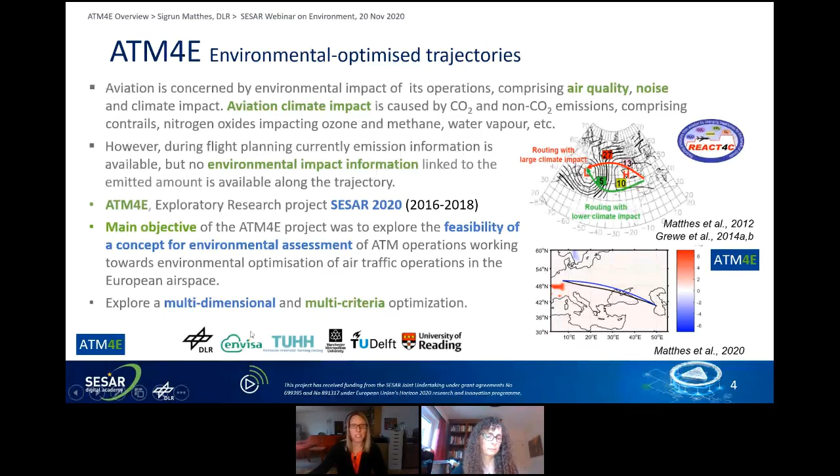This was a collaborative project, a small consortium led by DLR with colleagues from Envisa, TU Hamburg, Manchester Metropolitan, Delft, and Reading.

So how do we generate such environmental change functions? I'm showing here for local air quality, we established this kind of source-receptor relationship. We give an emission and follow it: how does it reach the ground, how does it impact air quality? This is based on dispersion modeling and chemical transformation modeling, and you see how emissions get transported and transformed.

These simulations were performed with a tool provided by Eurocontrol, also from Envisa. This tool allows you to use the meteorology and the setup of the airport, and you can generate the associated function for a specific airport.

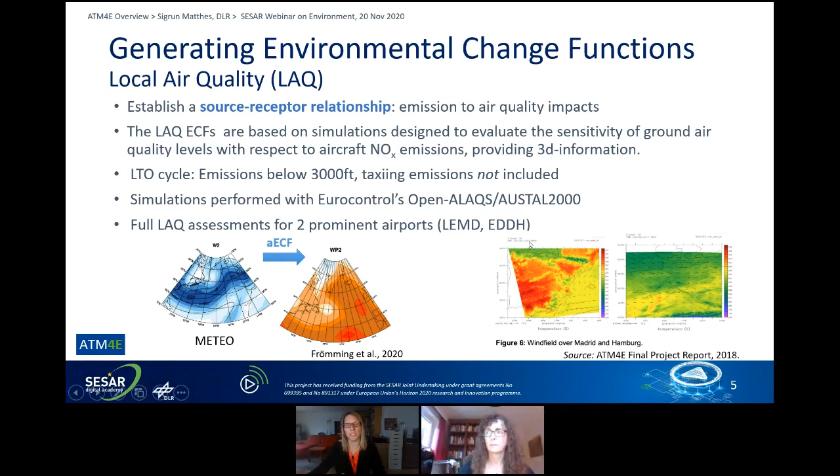So how does it look like? You have the dispersion model, the environmental impact of a certain unit emission, and you put it on the ground. Then you see where people live, who gets impacted by this fresh exhaust, who suffers from the decrease in air quality. By combining those two values—the amount of decrease in air quality and the number of people impacted—you can get a total measure of the impact of an emission release in a specific situation.

What you see here clearly is that the wind is advecting the air pollution in a certain direction, according to the prevailing wind situation. It was the same in Hamburg and Madrid on that specific day. While the emissions are advected, if you weight it with the population being exposed, it shows that the zones of large impact are to the northwest, because the pollution is transported to the places where people live.

By combining such information, we can provide a three-dimensional—or, because it depends on the meteorology, the date, the vertical layers, and the temperature profile of the atmosphere which determines the transport processes—a four-dimensional function, which is this environmental change function.

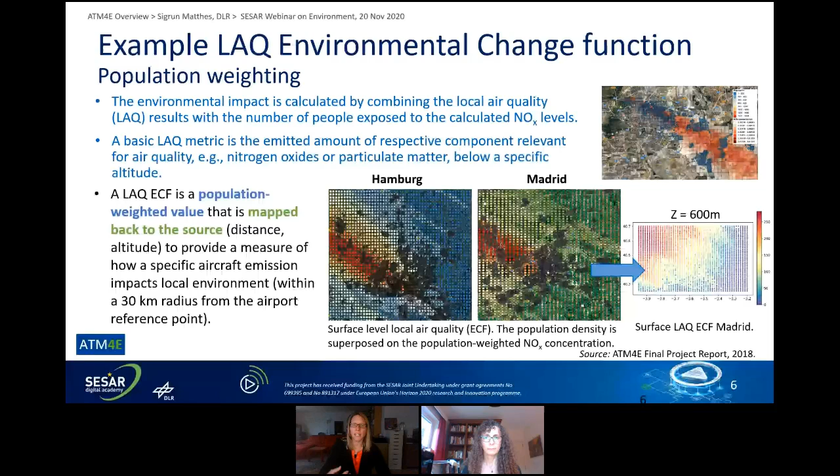We did the same for noise. I want to mention what the lesson learned was, because noise is much more complex than local air quality. You cannot simply emit a kilogram of a certain species. You have to know what the aircraft is, what the engine is, what the flaps are, and so on. So you have to make it much more complex.

The input data is much more multidimensional, and you also have to have a noise metric which works. So what is the noise metric you're going to be using? Of course, noise is also an issue for the operational and safety standards.

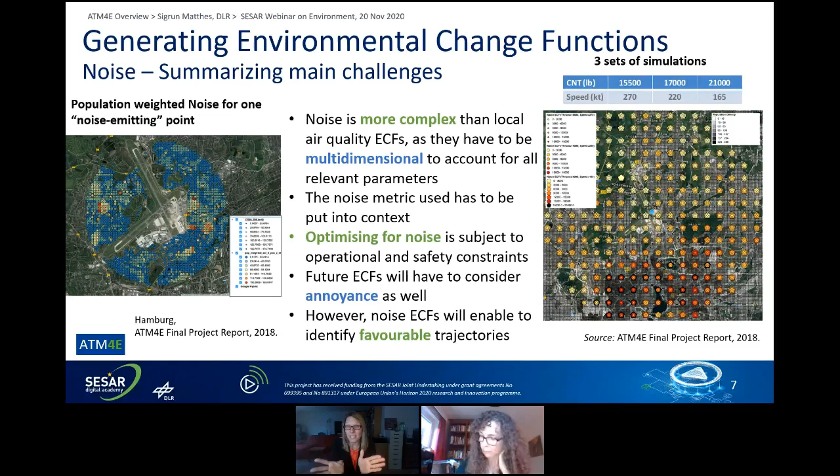For noise, there's also a tricky thing. There's not only a noise level, which is kind of physics, but there is also the question of the annoyance of it. So here is a kind of challenge identified: to define such a metric which allows us to use the same concept to see that emitting at a certain point means a certain amount of annoyance generated. However, we felt that having such noise ECFs available would enable us to identify favorable trajectories according to the metric.

So what we then did, after constructing these ECFs for the airport, was a one-day case study exploring a city pair by flying from Hamburg to Madrid. We did a trajectory optimization flying out of the departure airport, up to a certain flight level, and then into our destination airport, comparing always to the fuel-minimal solution.

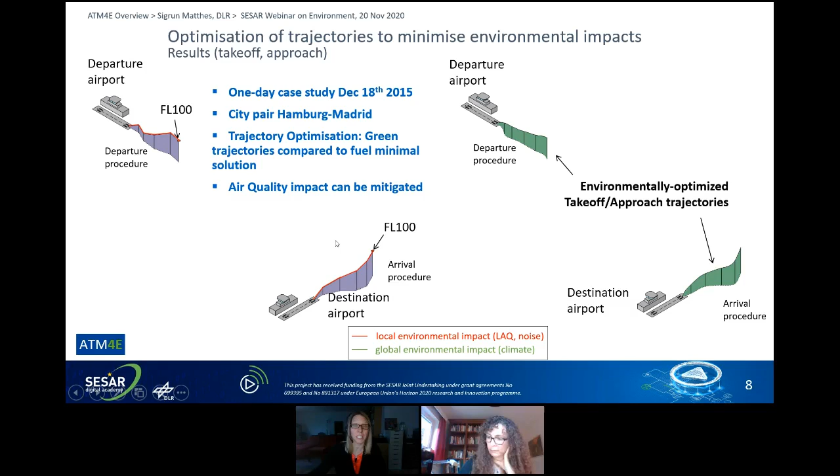To see to what extent an environmental optimization changes your trajectory, what is shown here is from our feasibility study for this city pair. This is the altitude, and with the color coding we are showing the local ECF function. So if you have white, there is no impact; if you have red, there is high impact. It's a bit tricky to see, but there are gradients in here too.

So what you see here, if you go for the takeoff, we have a trajectory which is the initial trajectory in the beginning. When you then try to mitigate and avoid the highly sensitive areas, you move your trajectory further up in terms of higher altitudes.

In order to measure the impact of our changes in the trajectory, we show on one hand to what extent we change the impacted population, to what extent we benefit in terms of environmental impact, while at the same time there is a certain fuel penalty. So the early solutions are the most efficient because they gain the most with a small increase, while here it would be a very inefficient option to go for.

By combining both effects, you get these Pareto fronts as a kind of three-dimensional figure where you can then aim for optimizing both.

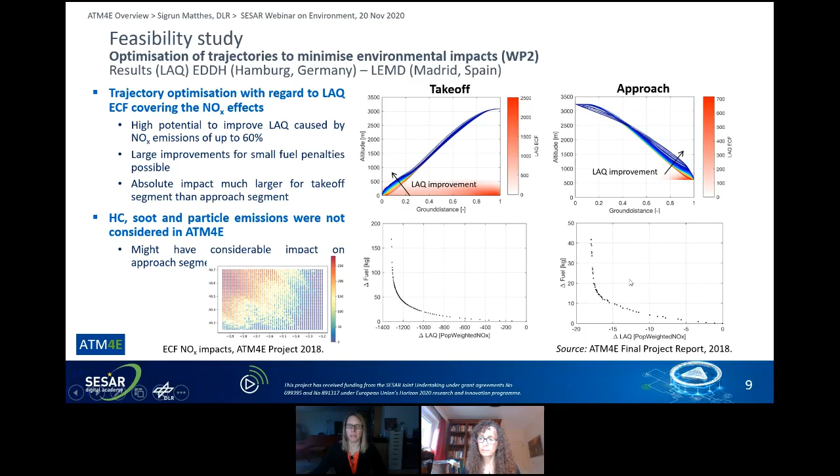Just a brief mention of the approach: we felt there was much less potential for improvement there. You see there is much less possibility for reducing the impact of air quality degradation at ground level. During this project, we identified real research needs on the environmental change functions.

We felt it would be really helpful to also see how this looks for the European airspace, to explore this concept further, and to see what happens on a full European scale application.

The ECF concept, I have to mention that and want to highlight this. We are talking about atmospheric measures and atmospheric behavior, so there is uncertainty with it because everybody knows there's predictability issues and uncertainty. What is required here are really robust measures. We have to provide robust solutions because if you fly an alternative trajectory, you want to make sure you're doing something better. That's the question of robustness.

This is further explored in a follow-on project called Fly ATM4E, which deals with the uncertainty of the weather forecast, the environmental impact, also in terms of climate change of aviation. There is the whole IPCC debate going on, but also the exact knowledge on the routing.

To close my overview, I want to give you a bit more flavor on the ongoing research projects still dealing with these aspects. The first one I already mentioned is this robustness criteria. We will be targeting on identifying situations which are win-win, meaning win for the cost and win for the environment compared to the real world. So where are inefficiencies which can be exploited?

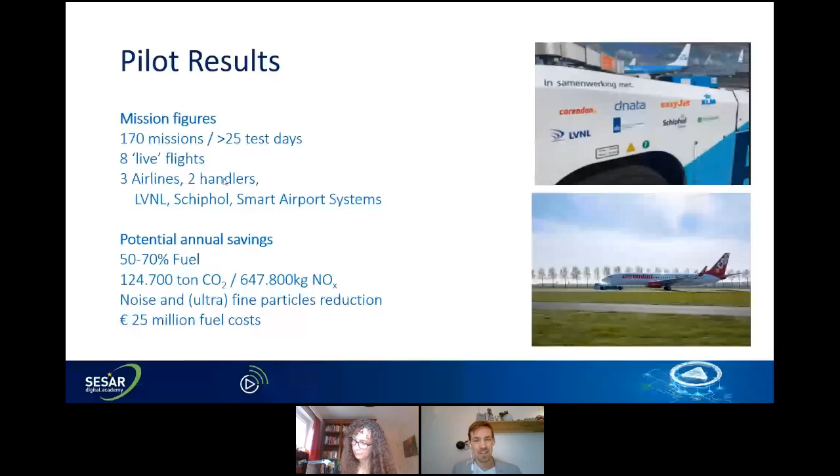We planned to taxibot at Schiphol Airport, which is a complex airport with 500,000 movements usually. We wanted to see what a taxibotting aircraft would perform like within this complex and busy environment. We do have future plans to look at this again when traffic is increasing.

From ATC perspective, from ground control perspective, in Amsterdam we work such that the ground controller is responsible for pushback clearance up until the taxiway and lining up the runway. What we did see is a shift in focus needed in order to implement taxibot procedures on a large scale. Normally, like I mentioned in the video, the pushback truck disconnects after pushback, and in his mental picture, a ground controller can block the bay and focus on the flowing traffic on the taxiways.

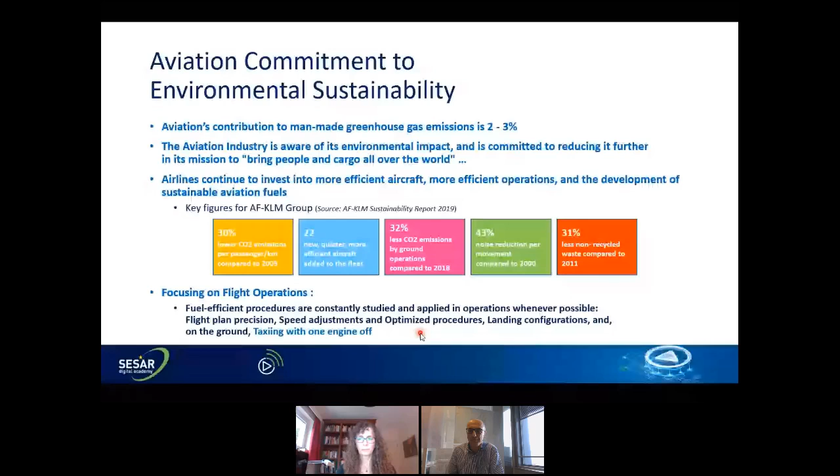Taxiing, the movement between the gate and the runway, is comparatively short of all phases of a flight. But it is not optimal because it is performed using on-the-ground turbine engines that are designed and optimized for flying, not for the ground. So it's a good idea to keep the time when the engines are running on the ground limited to the minimum necessary time.

Several results have already been obtained with this approach, for example with airport CDM that really optimizes the taxiing times, or with optimized use of the APU. But one idea is also to not use the entire set of engines of the aircraft during ground movements, because it turns out that a single engine can actually be sufficient to move the aircraft.

I will call it single engine; it is sometimes called engine off. I use single engine to make the distinction from all engines off, which is actually towing or taxibot, versus one engine off. Now, single engine is also not completely correct, because you may have a 4-engine aircraft running on 3 or 2 engines and so on. So anyway, think of it as any partial use of the set of engines of the aircraft during taxi.

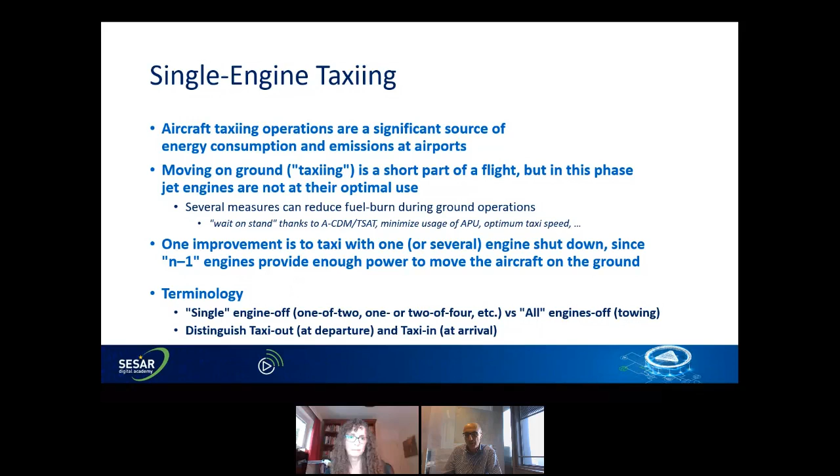These warm-up and cool-down times are of the order of a few minutes. It's quite variable, and there might be an effect, especially on takeoff, where different ways to do the warm-up may give different environmental performances when you apply full thrust. But basically, it's measured in a few minutes. And it turns out that the taxi times, though a little variable, are usually more minutes than what you need for the engines.

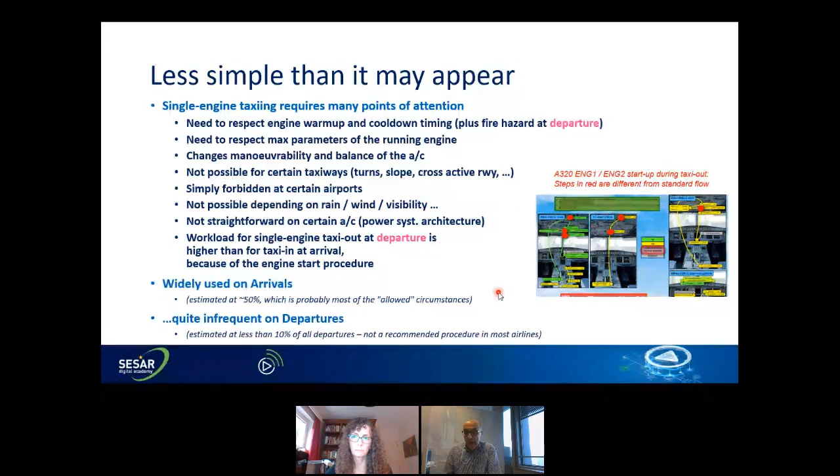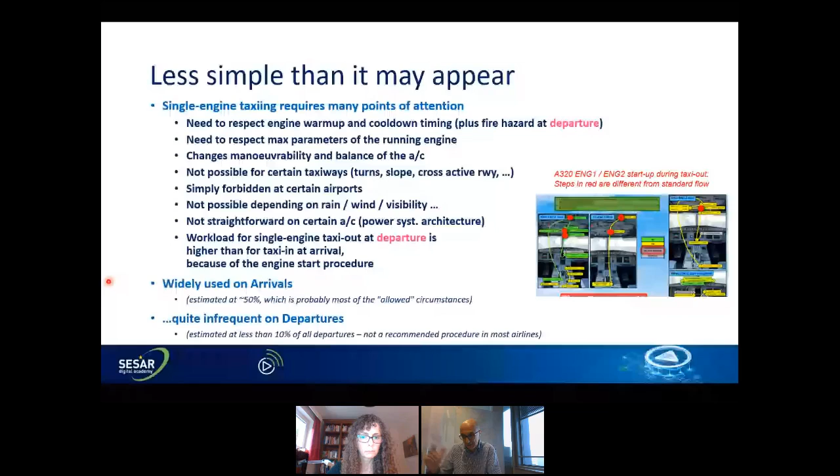In fact, single engine taxi out is not recommended by many airlines. We can estimate that on arrivals this is widely used - something like half of all flights apply this, and half of all flights is probably all the cases that actually qualify in terms of safety. Whereas it is still very infrequent on departure. So this is an area where there could be a possibility of looking for improvements.

Okay, if we look at what the challenges are and what needs to be verified in order to encourage doing departure single-engine taxi more often, it turns out from early investigations with our pilots that one important discouraging factor is this uncertainty about the exact available time between leaving the gate and having to put full thrust for takeoff.

The taxi times are given to the pilots as part of the operational flight plan, but these are statistical times because this information is delivered more than half hour before departure. So when leaving the gate, the real conditions at the airport at that moment, like the level of congestion, the waiting queue at the runway, can really make the difference in that uncertainty we mentioned, and could make the difference in favor or against going for single-engine taxi.

Because again, the decision must be made at the gate. If you don't start it, it's not started there. So you have the other procedure.

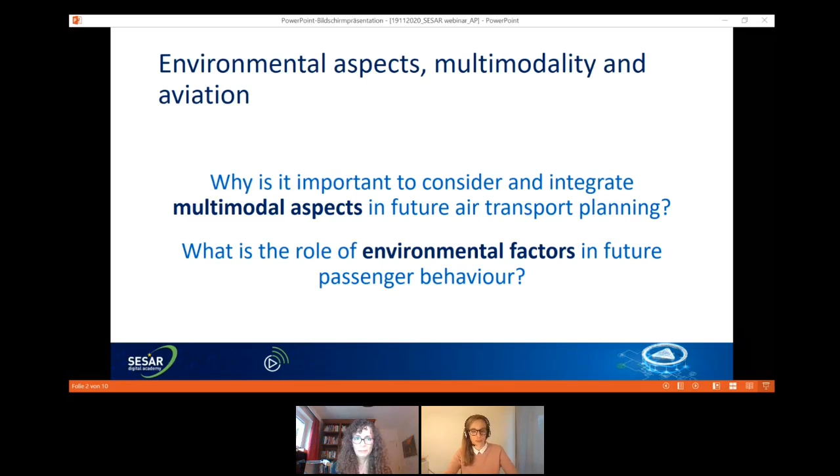When we talk about intermodality and multimodality, these terms are most often used in the same way. One way to describe it is that passengers, when doing a trip, can use different transport modes - for example, you can take the train or the plane to get to your vacation destination, so you're choosing between two different transport modes. On the other hand, it also denotes the concept of trip chaining, where you have different means of transport that you align with each other, for example using the bus to get to the airport to start your trip to go on vacation.

What is important in intermodal transport is to consider the entire door-to-door journey, as you can see at the top here, where you have different segments. For example, if you use air travel as one segment, you have to get to the airport, then you're traveling within the airport, and you have to reach your final destination as well. One of the European transport goals in this area is to enable passengers to shorten this time - it has been set to 4 hours. So transport planners and policymakers want to achieve a significant reduction in travel time for passengers.

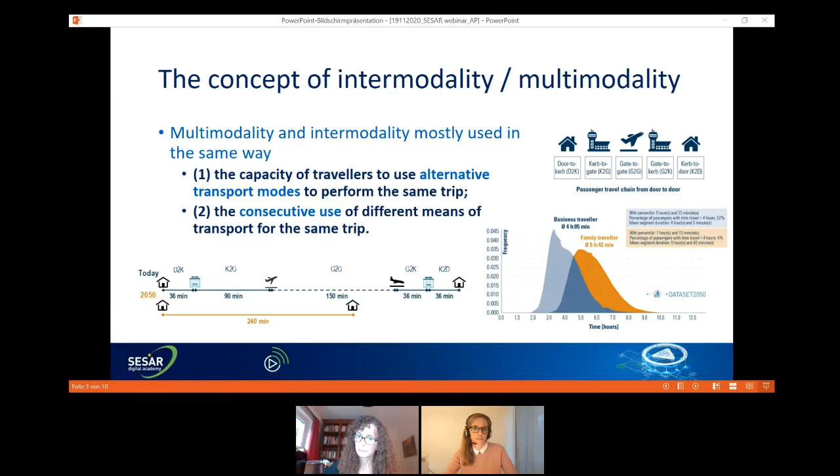And therefore, it's important to consider all these different steps in a combined trip analysis.

When we talk about environmental aspects and bringing these different things together, it is interesting and important to think about how environmental awareness and regulations can affect air transport. What we've seen in the past years is a change in awareness, but also new regulations coming up, and this might lead to passengers compensating their flights, compensating maybe their entire trip. Some of them are substituting away from air travel or not traveling at all, or they're substituting particular trips, for example, on the short haul. So this is interesting and important to consider when thinking about the role of intermodal travel, the role of other transport modes, and how this is affecting air travel.

What we see on the passenger side, or what we have been observing in the past years, is increasing environmental awareness. However, this awareness does not necessarily translate into actions. Everyone who is thinking about choosing a different transport mode, or maybe even in other areas doing something to reduce their footprint, does not necessarily act upon it. This is something we've observed in the past, but this behavior is also changing, as people are taking steps to translate that into action. We've seen different social trends, different paths in society pushing for stricter regulations in different areas to reduce the environmental footprint of very different areas, but of air transport in particular.

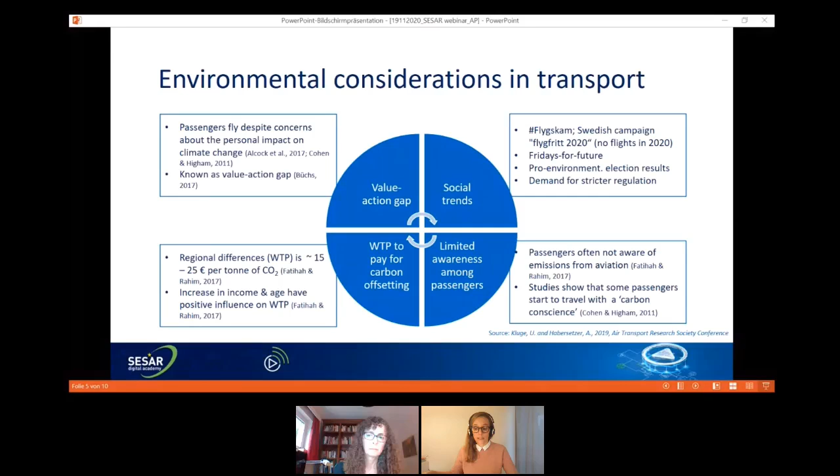And going along with that, a so-far limited awareness could be observed, but this is also changing. Passengers are aware, okay, if I'm going on a long distance trip, what are the emissions that go along with that? Do I really want to do that? Do I want to compensate my trip? This is what you see here, the willingness to pay, for example, for carbon offsetting of passengers is also increasing, but it differs very strongly across regions. So these are trends in behavior that we're observing, which can have a significant effect on air travel, by changing the perception of travelers.

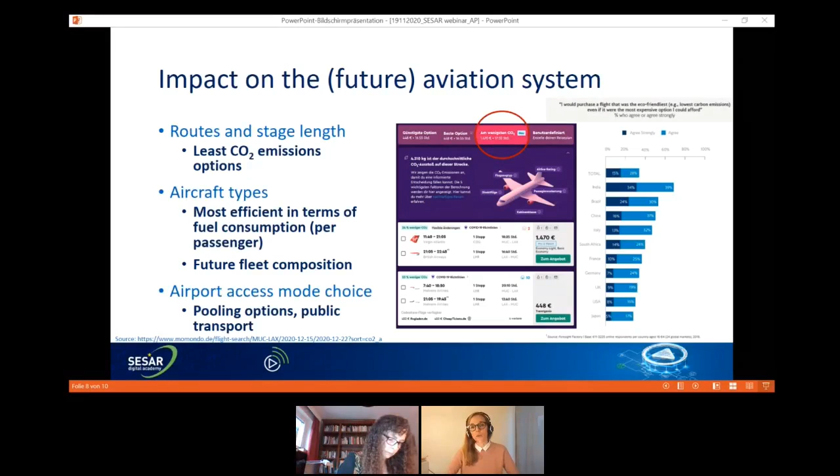Another important point, as I said in the beginning, is looking at intermodal transport options: how do people get to the airport, and which segment of their journey are they covering with which mode? For example, people on a long distance trip might use the train more to access the airport, or use the bus instead of short-haul feeder flights offered by airlines at their hub airports. This is a change we are anticipating in these different areas, which can have a significant effect on the different key performance areas in the ATM system.

One very interesting area we're looking at is the changing fleet composition and aircraft mix. As I said, people might move away from short-haul air traffic, replacing it with a train journey, and that might mean, hypothetically speaking, that we see fewer aircraft serving these short-haul routes, replaced instead with larger, heavier aircraft.

That would imply we might have reduced runway capacity due to larger wake separation minima, and also less capacity at the gate due to larger aircraft being parked, with different requirements for turnaround due to the ground handling required for these specific aircraft. So the fleet composition at a particular airport might change due to changing traveler behavior and switching to other modes on a particular stage length. This is something to consider for future ATM planning.

Also, as I said, with regulations and incentives being in place, we might see actual restrictions where particular aircraft are not allowed, or have to pay very high fees or taxes at an airport, thus influencing and incentivizing the change in fleet structure as well.

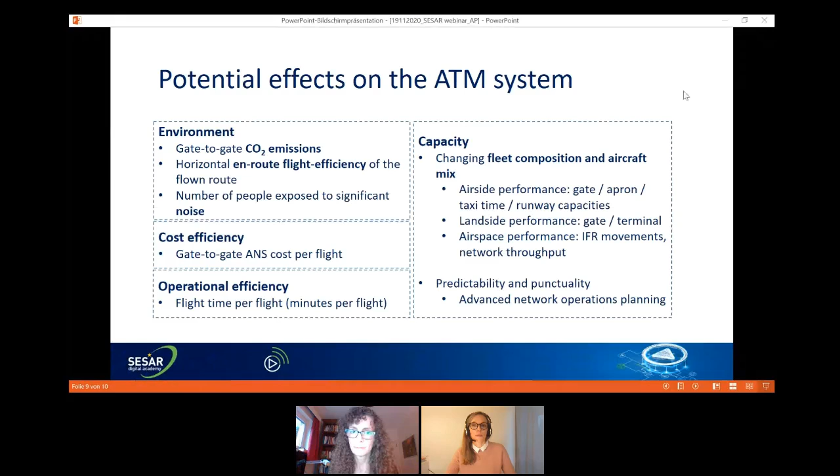One step towards analyzing that is our SESAR Horizon 2020 funded MODUS project, which Olivia mentioned as well, which started this year, and in which we're looking at the performance of the overall transport system, considering the door-to-door journey, in order to give an assessment about the role of air transport within an integrated intermodal European transport system.

We're doing that by looking at drivers for passenger demand and supply of mobility. For example, how is increasing environmental awareness changing the demand for a particular transport mode? We use that in our modeling exercises to model the allocation of demand across different transport modes and investigate the effects on overall capacity, giving a statement about how future air transport capacities might be affected if we see a very strong shift on short-haul markets to the rail sector, for example. We do that by taking into consideration different performance and connectivity indicators in order to identify the gaps we're seeing today and give recommendations on how to move forward.